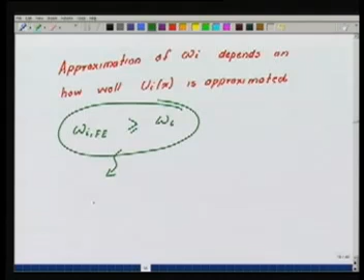We had said that certain properties hold for the eigenvalue problem formed in the free vibration case. One is that the eigenvalues or natural frequencies obtained from the finite element solution are higher than those obtained by the exact solution or the actual ones. This is sometimes referred to as the finite element system being stiffer than the exact one.

So this is a feature of the finite element solution that one has to keep in mind. Why? Because if I am writing a program to compute the natural frequencies of a system, which is a simple extension of what we had been developing till now, then as a benchmark I should test my program for specific problems for which I can construct the exact solution.

For example, the problem I have been considering here. In that case, when I use the finite element approximation and get the natural frequencies, I should get them to be higher than those obtained from the exact one, and as my mesh gets refined, they should converge to the exact one from above. These are certain features which have to be kept in mind. If it does not happen, then something is wrong in the way I have done my programming or developed the finite element approximation.

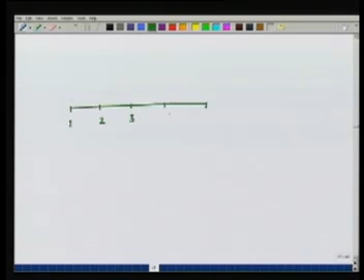Let's also look at some implementational issues. We had taken this example of a 5-node system, and we said let's take a linear, piecewise linear approximation. I can again take higher order approximations, just like we have done in standard finite element computation. So here, this is element 1, element 2, element 3, element 4.

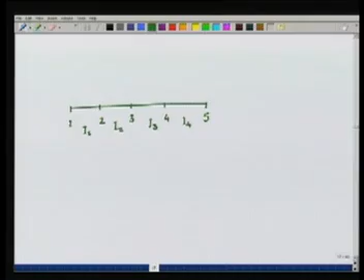Just like we did the procedure for static analysis, here we have to obtain the global matrices K and M from our finite element computation. How do I do it? Again, I will say, look, what is this? K was, as I had done, the integral from 0 to L of EA phi i prime phi j prime dx, which is Kij.

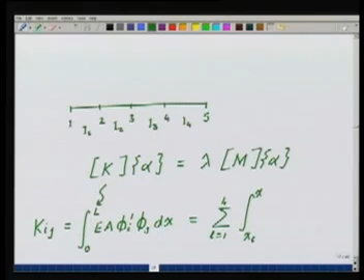This can now be written again as we had done earlier, as a sum over L equals 1 to, in this case, 4, the number of elements, of the integral from xl to xl+1 of EA phi i prime phi j prime. So you see that I can break the integral into the sum of integrals over each of these elements. Now, which of the phi i's are active in a particular element?

The only phi i's active in this element, let's say element 3, are phi 3 and phi 4. So exactly what we had been doing till now will now be done, and we will compute these matrices at the element level, assemble them into the global matrices, and we are done. But we will also have to do this for the mass matrix, where the integral will be integral of rho phi i phi j.

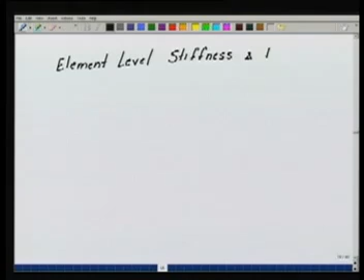So we have to now compute the element level stiffness and mass matrices. How do I go about doing it?

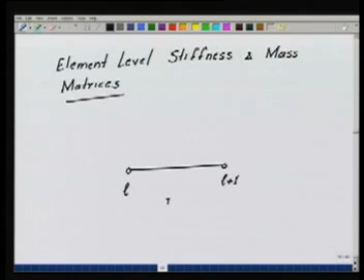Let's see. So we have our generic element with node L, L plus 1. This is my element IL. Here, the basis functions from the figure I have drawn which are non-zero will be phi L and phi L plus 1. These will correspond to the element level N1 of the element, and this will be N2 of the element.

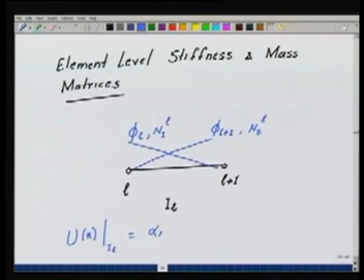So if I want to write u(x), the approximation of it in the element IL will be equal to alpha L phi L plus alpha L plus 1 phi L plus 1. You see, these things won't change, they remain the same as what we had been doing till now. So what we are going to do is find the effect of these in the integrals.

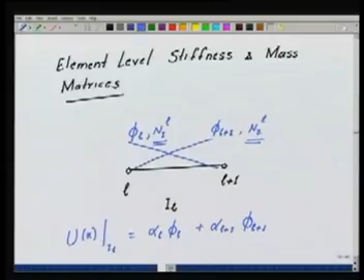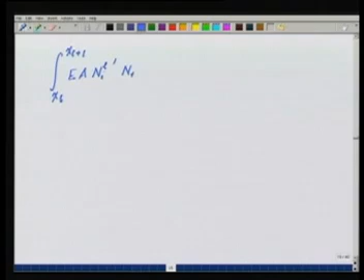So we will have, at the element level, the integral from xl to xl plus 1 of EA, ni for the element prime, nj for the element L prime, dx, where prime means the derivative with respect to x.

This is equal to kij for the element L. What is this i? i is equal to 1 to 2. In fact, if you use higher order approximation, it goes up to p plus 1, and j is equal to 1 to 2. So this will give me a 2 by 2 matrix in the case of the element.

Similarly, I will have integral from xl to xl plus 1 of rho, ni for the element, nj for the element, dx. This is equal to mij for the element L.

Now what is the assembly procedure? The assembly procedure is that i locally at the element level corresponds to some global i, and similarly j at the element level corresponds to some global j.

So i equal to 1 corresponds to L globally, i equal to 2 corresponds to L plus 1 globally, j equal to 1 corresponds to L globally, and j equal to 2 corresponds to L plus 1 globally. That is, I again use the local to global enumeration routine that we had made long ago in the one dimensional code to give me this information.

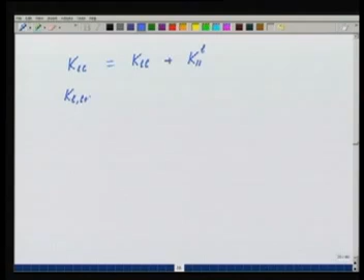And then what do I do? I will go and assemble in the following way: K(L,L) will be equal to, at the global level, K(L,L) plus k(1,1) from the element. K(L,L+1) will be equal to K(L,L+1) plus k(1,2) for the element. K(L+1,L) will be K(L+1,L) plus k(2,1) for the element. K(L+1,L+1) will be equal to K(L+1,L+1) plus k(2,2) for the element. So this is the simple assembly procedure for the K matrix.

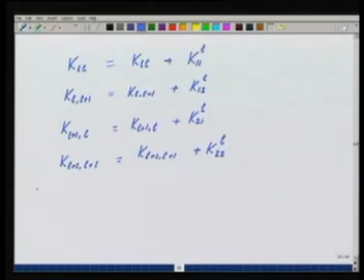It's exactly the same as what we had done, and similarly we'll do for the mass matrix assembly, that is M(L,L) is equal to M(L,L) plus m(1,1) for the element, M(L,L+1) is equal to M(L,L+1) plus m(1,2) for the element, M(L+1,L) is equal to M(L+1,L) plus m(2,1) for the element, and finally M(L+1,L+1) is equal to M(L+1,L+1) plus m(2,2) for the element.

This is all. So we do this assembly procedure, we loop over all the elements, and we construct the global K and the M matrices.

Now the question is that the K and the M, if I take again our problem that we had considered, the mesh that we have taken, this will be a 5 by 5 system, but from the boundary condition at this end I have to put alpha 1 equal to 0, because ux has to be 0 at the point x equal to 0. So how do I enforce alpha 1 equal to 0?

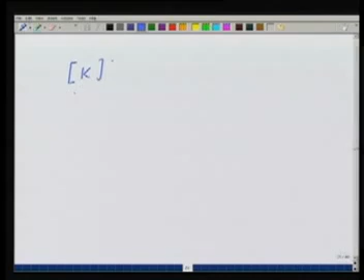One way is to actually take the global systems and eliminate alpha 1. So set alpha 1 equal to 0 from the boundary condition. We can do that, reduce this 5 by 5 system to a 4 by 4 system, that is just remove the variable alpha 1 and the first equation.

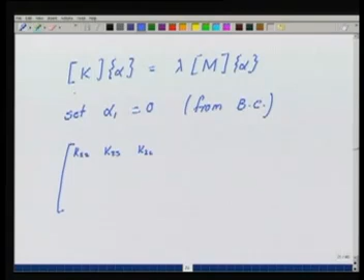So we will actually be solving for the system which will have k22, k23, k24, k25, all the way down to k52, k53, k54, k55, this into alpha 2, alpha 3, alpha 4, alpha 5.

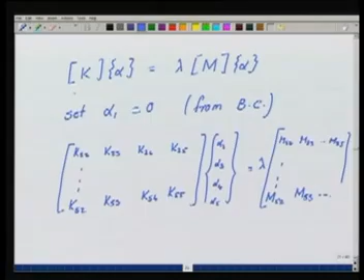This will be equal to lambda here m22, m23 and so on, m25, m52, m53 and so on up to m55 into alpha. So this will be the reduced system, or we can use the tool that we had developed for doing the elimination, that is we go to the 5 by 5 system.

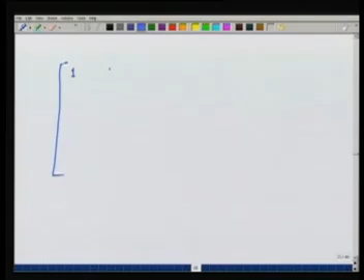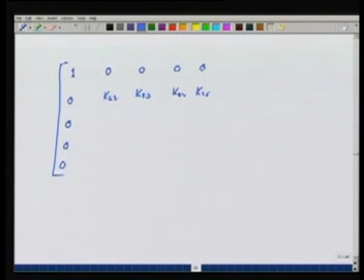How did we set alpha equal to 0 on both sides? We will simply eliminate. So we will do this: set this entry to 1, then make the rest 0, then I will have k22, k23, k24, k25 and so on into my alpha array. Alpha vector is equal to lambda into, I will put again here 1, 0, 0, 0, 0, 0, 0, 0, 0 and then m22 and so on. So what this will do is the first row gets completely decoupled and you will get essentially alpha 1 is equal to lambda alpha 1.

Okay, this will give me lambda is equal to 1. So we will get one eigenvalue as 1, throw it out.

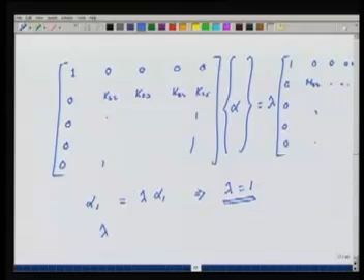We will not consider this eigenvalue in our system of natural frequencies. We will throw it out, and the remaining four eigenvalues are the ones we are going to take. So we will take lambda 2, lambda 3, lambda 4, lambda 5. These will become our modes.

This becomes the first mode, this becomes the next, and so on. So this will lead to our omega 1, this will lead to omega 2, this will lead to omega 3, and this will be omega 4.

You should check that indeed the eigenvalues are the same as what you would have obtained by doing this, or the next one would be equivalent, but throw this eigenvalue out from your set of equations. So with this we should be in a position to set up the eigenvalue problem and solve it.

One more thing we'd like to talk about is, while doing these integrations, we go to the master element, use all the tools we developed for integration over the master element, do the numerical integrations, create the matrices, and you will get a solution.

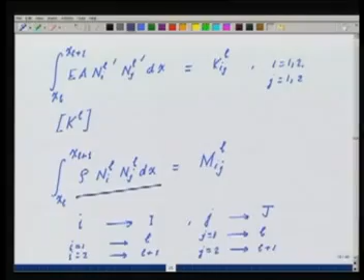Now let's go back and see what we had done as far as the exact solution is concerned.

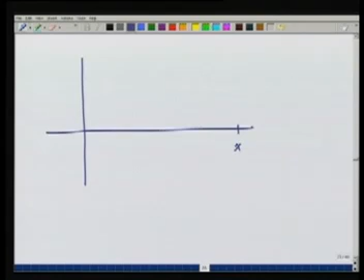Imagine now, let's go back and recreate this picture in what we are doing. This is x equal to L, and here is my exact u1 as a function of x corresponding to omega 1.

What will my finite element approximation do if I took a one element solution? That is, if I took a mesh with only one element, x equal 0 to L, I simply put one element. In that case you'll get a 1 by 1 system, because one element will have two nodes, this node will be knocked off, and you'll only be left in terms of this one.

The solution may look something like this. This will be what you get as u1 FE from the finite element solution. It will be a straight line. Now this curve is quite a nice curve, so this won't be such a bad approximation, and you can see that if you solve the one element problem, that is a single degree of freedom problem, you will get an eigenvalue very close to the exact one.

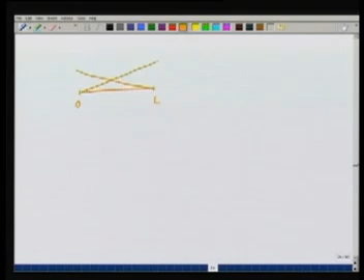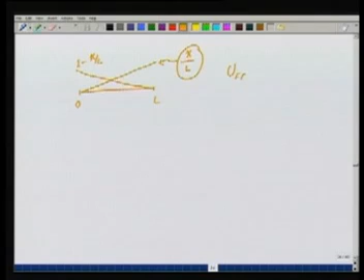In fact, we can do it here. Let's do it here. If this is 0, this is L, the first shape function will essentially be this one, and this one. This shape function will be x by L, and this one will be 1 minus x by L. So we are only interested in this one. So our u FE as a function of x will be equal to alpha x over L.

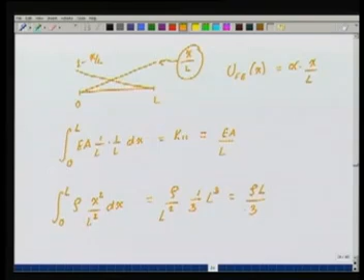So integral 0 to L of EA times the derivative of x by L, so 1 by L into 1 by L, dx, is equal to k11. This will be equal to EA by L. Similarly, the mass matrix will be 0 to L of rho times x squared by L squared dx. This equals rho by L squared into x cubed by 3, so it's 1 by 3 L cubed. So this will be equal to rho L by 3. So we get this is M11.

Now if I do this problem, I'll get K11 times alpha equal to lambda M11 times alpha. This implies lambda equals K11 by M11, which equals EA by L divided by rho L by 3. So this equals 3 EA by rho L squared. So lambda, from the finite element solution, will be 3 EA by rho L squared. So this is what we'll get for that problem.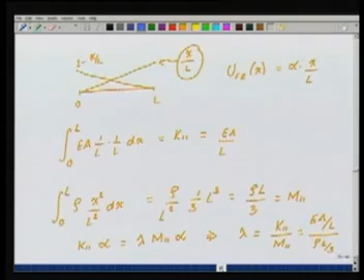So once we have this, now what about the alpha?

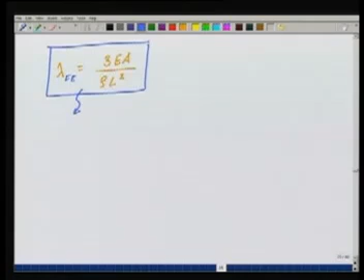The alpha can now be computed quite easily, but let's look at this lambda. What was the lambda exact? If I go back to my earlier result, lambda exact will be equal to...

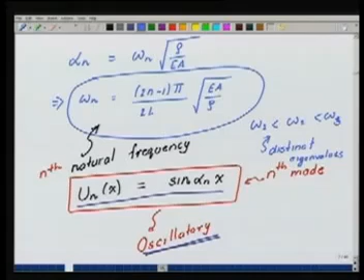Much earlier, it will be essentially the square of this, because if you remember the way we have done, omega squared was our lambda. So let's go to omega: 2 into 1 minus 1 pi by 2L EA by rho. So that whole squared, pi by 2L EA by rho whole squared, that will be pi by 2L into EA by rho whole thing squared. This will be equal to pi squared by 4 into EA by rho L squared.

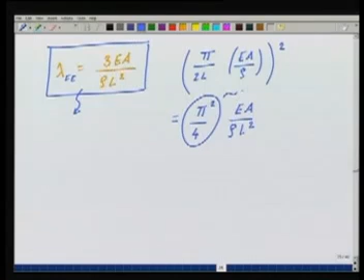If you see that pi squared will be approximately 10 by 4, so this will be approximately 2.5, and what you get is approximately 2.5 EA by rho L squared. This is the lambda exact.

Now you see that the lambda exact is less than the lambda we have obtained, and the eigenvalue or the natural frequency will be square root of this. You see that this is quite close as an approximation, not bad. With one element we could create a solution which is quite close to the one which we actually needed.

Now let's go back and look at the two-term solution. What will happen if I do a two-term solution, that is when I put two elements? You see that my approximation of the mode shape will become better.

As this becomes better, I will see that my lambda 1 FE will come much closer to lambda 1 exact. Further, you see that if I took this one-term solution, I just cannot expect to do a good job for the second mode. There is no second mode which I could capture.

With the two-term solution now, I will have two eigenvalues, that is, two frequencies can seemingly be approximated with the two-term solution. What was my second mode? If you remember, the second mode would do this.

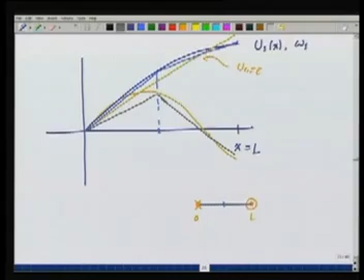But nevertheless it's an approximation, and you will see that when I took a two-element mesh, my lambda 1 FE will be very close to the lambda 1 exact, but the lambda 2 FE will not be as close to the lambda 2 exact. It will again be higher, not so bad, but badness will certainly be more as compared to lambda 1. So what we can do is, as we refine the mesh further and further, the quality of the approximation of the natural frequency or the eigenvalue becomes better and better.

That is, with the mesh size h, the lambda FE, or in that sense omega FE, tends to the omega exact. How fast? There's a very interesting way of measuring it.

If you say in this case where we have distinct eigenvalues, lambda I exact minus lambda I due to the finite element solution for a given mesh - I could have 100 elements in the mesh, or I could have 5 elements in the mesh - but as the mesh is refined, that is as the h changes, using the h method or the finite element method, this will be less than or equal to some constant into the strain energy of

This is called the strain energy of the error in the mode, in the eigenmode, or in the eigenfunction. So how well your finite element method can approximate the corresponding mode also reflects on how nicely you can obtain the corresponding frequency.

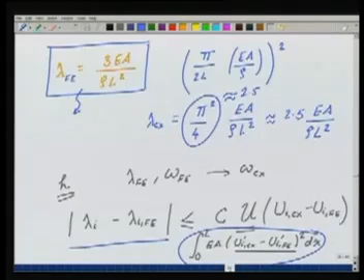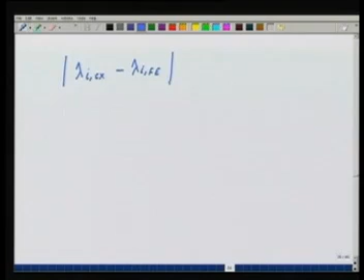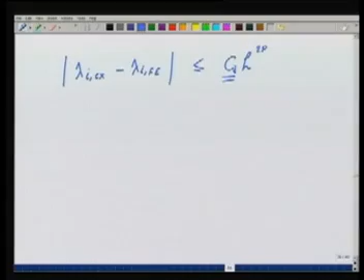You see that this number is dependent on this squared. In the case of the eigenvalue problem, essentially lambda I exact minus lambda I FE goes as some constant C times h to the power of 2p. Now C will change for the corresponding mode—as you go to higher and higher frequencies, this constant will degenerate further, so you get bigger error, but the rate of convergence remains the same: twice the rate of convergence of the normal finite element solution.

Remember we talked about the energy norm, the square root of the strain energy. Here the error in the eigenvalue converges as the strain energy itself. So eigenvalue problems are much more forgiving compared to getting pointwise stresses or strains—you can obtain your eigenvalues with a much coarser mesh. Pretty good values of eigenvalues or natural frequencies can come with a much coarser mesh than what is needed for pointwise estimation of stresses.

Another issue to keep in mind: depending on the particular problem, you have to design the approximation so that you get accurate results, and you should know more about how the solution behaves, in order to be confident of what you are computing and what you are giving to the user.

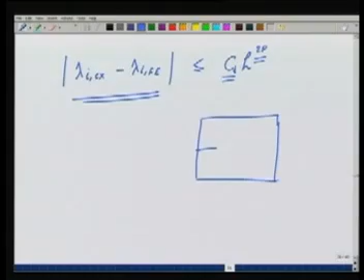Incidentally, this same feature also works in two-dimensional problems. Say I have a domain with a crack. Here I may be interested in solving the elasticity problem, or in getting the natural frequencies. In that case, the nature of the solution and how you do the approximation in the vicinity of the crack tip is going to affect the quality of the natural frequencies you compute for the cracked plate. So the meshing near the crack tip becomes very important—we cannot ignore it.

In fact, in this case lambda I exact minus lambda I FE goes essentially as some constant times h to the power of the minimum of 2 alpha and p. It depends on whether alpha is small or p is small. In general the crack leads to alpha, which, if you remember, is the exponent of the leading singular part of the solution. For a crack, alpha is essentially half, so any p you take will be greater than half, meaning alpha dominates. The nature of the singularity at the crack tip dominates the rate of convergence, and you have to do everything we did for stress computation to get a good solution. But nevertheless the rate of convergence still has the 2 in the power, so it's certainly better than pointwise data—here we're talking of lambda as a global data.

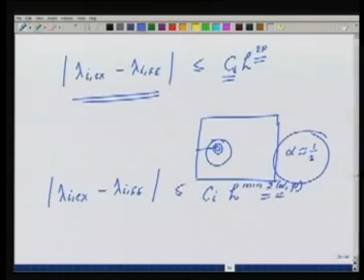So similarly, eigenvalue problems can also arise in the case of buckling—buckling of plates, beams, etc.

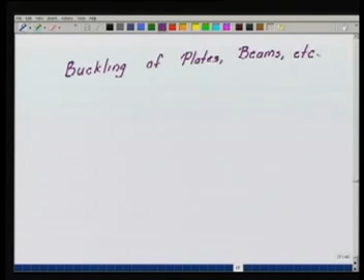In this case, what happens is you plot P against the deflection for a beam, say the tip deflection. The load is applied as a compressive load to the structure at the tip. This compressive load should lead to only axial deformation, but there comes a value where, if I keep increasing the load, the beam or bar does not deflect in plane—it wants to move transversely instead, so it tries to have a transverse deflection.

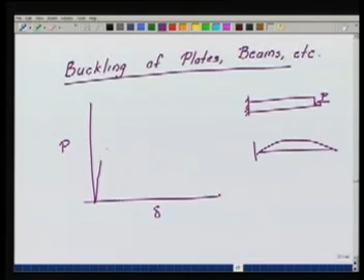How do you take care of that? For that we look at equilibrium in the deformed configuration, and there's a whole theory behind the analysis. As P increases, the transverse deflection—say of the tip—increases, there comes a critical value, then it falls. This is essentially what we call the buckling load, or P critical. We try to approximate it, even though it's a nonlinear problem, using a linearized problem.

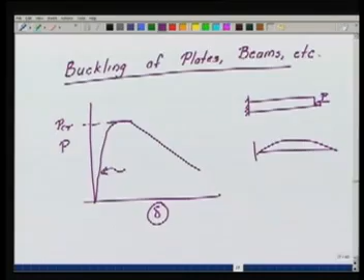In the nonlinear problem we use concepts from finite deformation elasticity, but we are not going to use it here. The idealization is based on assuming that up to the critical load the member essentially behaves in a linear elastic way, giving only axial deformations due to compression. At the critical load, it develops transverse deflections also.

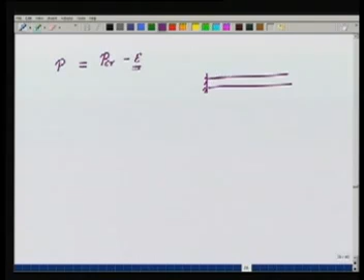Without going into the details, let's say I am applying a load P just less than P critical, minus a very small number. In that case, equilibrium under the action of the load for this member is governed by standard linear elasticity. In the energy sense, writing the weak form of the bar problem: integral 0 to L of EA du/dx dv/dx dx equals P times V at L, or minus P times V at L. This is what drives the problem.

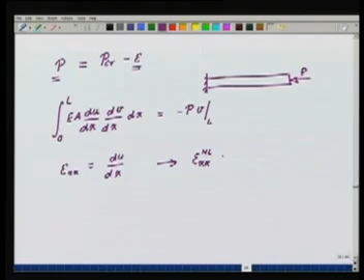Now at the critical load, what happens if I increase this load a little bit to reach P critical? At that point, the strain is no longer given by du/dx alone. The strain will be governed by the nonlinear or finite strain, the Green strain, given approximately as du/dx plus half of (dw/dx) squared, where w is the transverse deflection. This, by throwing out higher order terms, is called the von Karman theory approach.

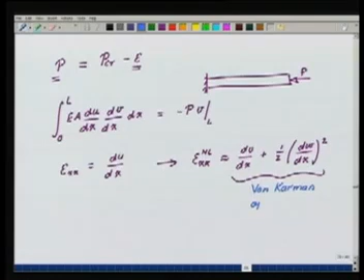If you cut anywhere, the axial force is P, and you can show that when you increase the load a little bit, assuming equilibrium corresponding to this load, applying the extra load takes you to the new equilibrium position. This new equilibrium position will have an additional displacement in the axial direction and the transverse direction. This is generally given in terms of perturbational displacements from the current equilibrium configuration, and it can be shown that this whole thing can be written in terms of the following.

The weak form will be equal to P times the integral from 0 to L of dWp/dx into dWbar p/dx.

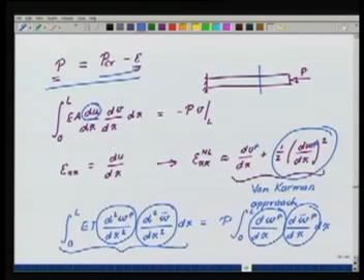Where K, for the bending, times alpha equals P times what we call Kg, the geometric stiffness matrix, times alpha. This is called the geometric stiffness matrix or geometric part because it comes from representing the large strain components.

Now what will be the entries of K? Kij equals the integral from 0 to L of EI phi i double prime phi j double prime dx, and Kij geometric equals the integral from 0 to L of phi i prime phi j prime dx. I am not writing these things in detail.

Now I am really interested in finding the load P at which this transverse deflection occurs, so I set this up. The phi i's are C1 functions, which is very important, because we want phi i double prime phi j double prime to be defined. So we do the same thing again: Wp as a function of x is given as the sum of alpha i phi i, for i equals 1 to some number of unknowns n.

Okay, so this gives me the eigenvalue problem where lambda is equal to P, that is my buckling load, the unknown load, and the critical load out of this is essentially equal to the minimum eigenvalue that you have. That's what I'm looking at, I would like to obtain the minimum eigenvalue corresponding to this problem. So P critical is equal to the minimum eigenvalue, and how many eigenvalues will we get for this system? We will get n, depending on the number of unknowns.

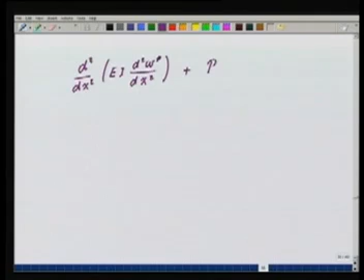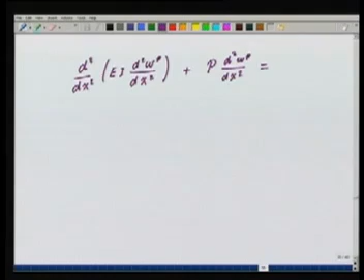Similarly, if I solved this in the continuum form, if you do the formulation in an exact form, P, this would be the exact differential equation that you have. And again, if you solve using what we already used for the free vibration problem, I will get infinite values of P, because this is an eigenvalue problem at the continuum level. There will be distinct values of P, and corresponding to each P I will get a buckled shape, a buckled mode shape.

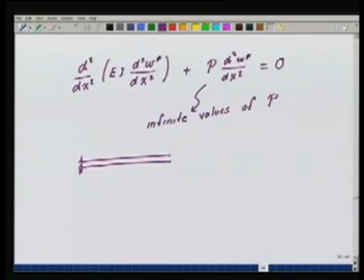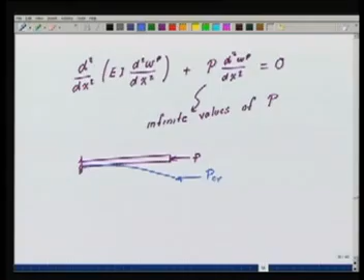That's exactly what we do in our buckling analysis. If you take a rod like this and apply a compressive load, how will it deform? It will deform like this. So the rod will become this at P critical. When the load becomes P critical, the rod will become this. So as we talked about earlier, here we have lambda 1, lambda 2 up to lambda n, such that lambda 1 is less than or equal to lambda 2, less than or equal to lambda 3, and so on. So the first eigenvalue is the one I am interested in.

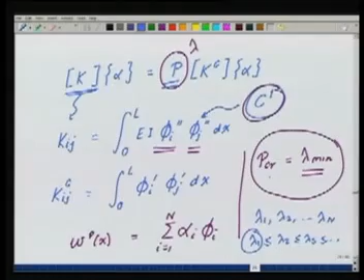Now this is very important also from an implementational point of view, because in this analysis we are most often only interested in the critical load, so I am interested only in the first eigenvalue. If I am interested only in the first eigenvalue, I really do not need to compute the remaining eigenvalues. I can use faster solvers which give me the first eigenvalue very nicely. The cost of computation comes down tremendously if I am interested in only the first few eigenvalues and not demanding all the eigenvalues.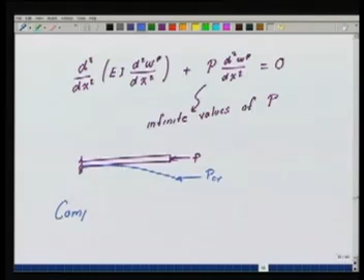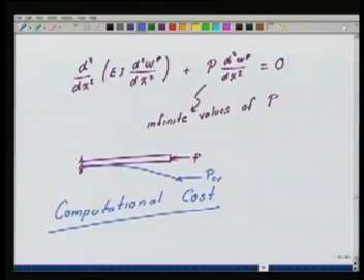So as an implementational issue, computation cost for the eigenvalue problems is a big issue. When I want to get information about the first few eigenvalues or one eigenvalue, the cost comes down tremendously. What will be the accuracy of the P critical that we obtain?

Again, it will be determined essentially by this strain energy, the bending strain energy of the perturbational transverse displacement WP, and how well we are approximating WP. That is, how well is my finite element solution going to represent this mode? With one element I'll get this. So it's exactly the same theory. Certainly there are certain differences, but the same ideas can be extended to the eigenvalue problem and its computation.

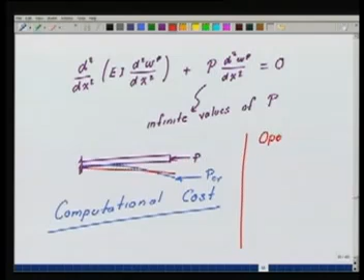There are lots of eigenvalue solvers available in the open source. You can download it from the net, or from numerical recipes in Fortran and C. There are so many books on those. They also have eigenvalue solvers, which are generally a little bit more difficult to make, program, and finally make useful for computation, as compared to the solvers we had for the inversion of matrices.

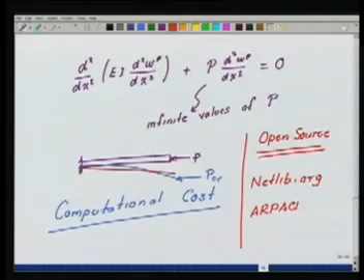So from the open source you can have many such algorithms available. You can go to a site called netlib.org, this is an open source site, and you can download lots of routines from there. There is something called ARPACK, which is a very powerful generalized eigenvalue solver package, available again as a free open source package, which can be used to compute eigenvalues of large systems.

You see that here we did not really say what is the size of the system. Depending on the problem, for a 1D problem, the meshes are small, the approximation is small. When I want to do this eigenvalue problem in 2D or 3D, for example in 2D, a very important case is when I am interested in plate buckling. In this case, the plate is subjected to a compressive load or even to a shear load. Here is my plate subjected to some shear loads.

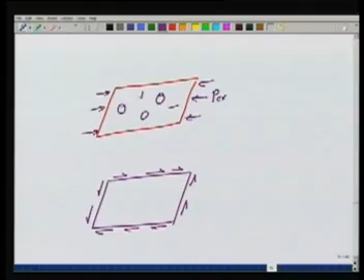In that case, I am interested in the critical value of this load. If the plate has cutouts everywhere, or cracks sitting at various sites, I have to resolve these geometrical details properly so that my finite element solution corresponding to the buckled mode shape is not bad.

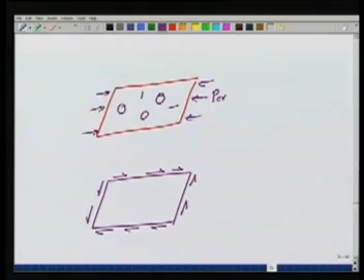The finite element solution has to be good in order to have a good value of P critical, so we have to do meshing which is fine and detailed enough to take care of these details. This leads to a very large sparse eigenvalue problem. The mass matrix and the stiffness matrix K could be 20,000, 30,000, or even 40,000 by 40,000 in size. Getting the eigenvalues becomes a tough job, and some of these algorithms have to be used. There is a lot of literature available on how to solve a large sparse eigenvalue problem, which you can use straight away.

In this lecture, we have tried to cover some classes of eigenvalue problems that arise in mechanics. Some typical examples we have taken are the vibration problem and the buckling problem, both of which give rise to eigenvalue problems that have to be solved.

First they have to be formulated in the finite element sense, then solved, and then checked whether those numbers are reliable or not. So benchmark problems have to be solved, and for students it won't be very difficult to program these in the existing static analysis codes.

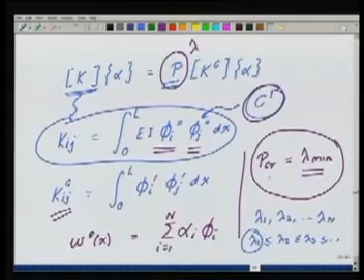Because you already have the structure with the shape function routines and element calculation routines, all you have to do is add the extra parts for computation of the mass matrix or the geometric stiffness matrix. Follow the same procedure you were following for assembly, assemble these matrices, and then get an eigenvalue solver, put it in, and check.

This way we can now expand the codes we have developed, the 1D and 2D codes, to also take care of eigenvalue problems, and so we can create much more information which is useful to a designer or to an analyst.

In the next lecture, we are going to look at problems which fall in the category of nonlinear problems. Till now we have only dealt with linear problems. What we will do is add nonlinearity into the system, which is not forced, but this is where the real situation is.

Actually most problems in reality, in real life, are nonlinear in nature. So those nonlinearities, if added to the system, what happens to the response in terms of the finite element solution? That is, how do I do a finite element computation that gives me the correct information? We are going to look at the finite element formulation for nonlinear problems, and from there we will start.

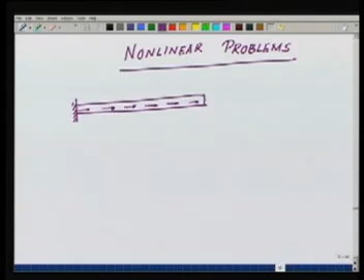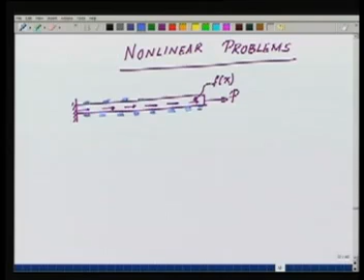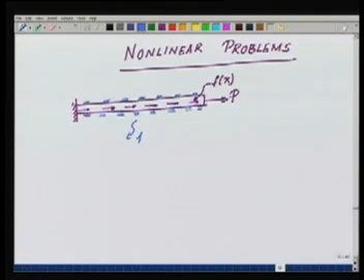A simple example: I take a bar, the same bar we had, with P and f of x. I will now make it lie on elastic supports on either side, such that the distributed support can be represented by a distributed axial spring, with spring constant kx, which we had earlier taken as k naught. Now I will add a part so that the spring has a nonlinear part in the definition of the spring constant.

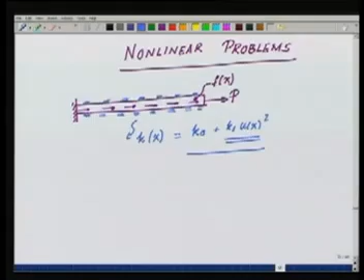How do I take care of the response of the bar with this kind of support spring? For example, this could be the effect of a rubbery support, where the rubber behaves in a nonlinear way with respect to the force applied. So this could be a model of a rubbery spring. We could add more complexities, but primarily we will take this problem as the basis for which we will develop the nonlinear analysis tools. We will solve the problem and see how well or how badly we do with respect to the exact solution.